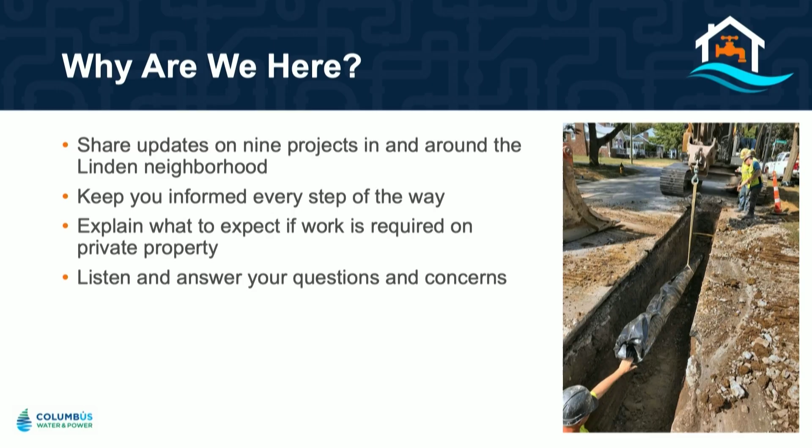Okay. So again, we're here tonight because there are 9 construction projects happening in and around Linden. I know not all of you are from Linden. Some of these construction projects will be happening outside of the Linden community. And again, we'll have a brief Q&A after this presentation and then release to an open house. I'm here with Emily Eskridge from Columbus Water and Power, and she's going to give you some information on our water quality.

Can you hear me? We got to turn down. That's all right. All right, can you hear me now? Perfect. Sorry, I'm trying not to have the mic interfere with Hannah's mic. They mic'd her up, but I get to hold one, so, it's exciting.

My name's Emily Eskridge. I am the Regulatory Compliance Manager for the Division of Water for Columbus Water and Power. I oversee all of our compliance requirements with the federal government, Ohio EPA, and under that is our lead and copper program, which is one of the programs that I manage. I'm here to talk a little bit about why we're doing this project and a little bit about things you should know about lead and lead service lines.

The first thing that we always like to lead with, though, is there lead in your water? We start talking about lead, and I know people see images of Flint in their mind. They worry about having a lead service line. Obviously, none of us want to drink lead. The good news is that we don't have detectable lead in our water. The City of Columbus samples on a regular basis.

We have a very effective corrosion control program, and we actually partner with the Columbus Public Health Department, and anytime we have a household with elevated blood lead levels, we take a water sample as well as any other public health investigation samples. The vast majority of those are non-detect. It's very rare that we see even the lowest level of detection because of our effective corrosion control.

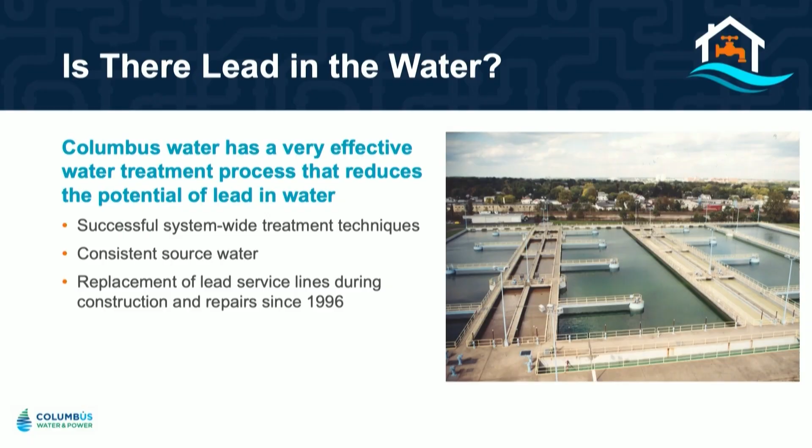I think the timeline has definitely advanced us to do this faster, but we were already doing it. We've been doing it since 1996. Now we've hastened the timeline. So that's why there's so many projects that you'll see in your area. There's a lot more work happening all at once. And ultimately, like I've said here, we have really effective corrosion control, and we've been actively removing since 1996. There's still some lead left. I know people are surprised by that, but it's time to take it out.

Ultimately, Lead Safe Columbus is a program that we've put in place in order to replace all lead and galvanized service lines. Galvanized service lines are galvanized steel lines. Most of them are downstream of lead, and they can collect lead particles. That's why the galvanized lines need to come out as well. These lines are well beyond their useful life, and I want to drive that home.

If you have a galvanized service line, it is at least 60 years old because we have not allowed that for 60 years in our system. A lot of them are being held together by the ground. So I really, really recommend that you sign a work agreement. Let us take it out for you for free.

It's going to save you money for us to do this, and then you're going to have a brand new shiny line that will really invest in the structure of your home and make sure that you have a good working service line for the next 20 to 40 years. We're doing copper, so probably 40 to 50 years. It'll last a long time.

As part of this program, we are prioritizing historically underserved communities. We're partnering with other city projects, and we're trying to collaborate as best as we can with other city departments. We want to be efficient. We want to get it done with one hole in the ground, not 3 holes in the ground. And we want to try to get in and out of your neighborhoods without disrupting your lives as much as possible.

So you might be thinking, what is a water service line? If you're here, you probably know. It's the line that delivers water to your home. It starts at the main. Most mains are under the street. It'll go to a curb stop. If you look near your sidewalk or in the tree lawn between the sidewalk and the street, you might see a little circle. That is the curb stop. That's the valve where we can turn water on and off. The city side is between that curb stop and the main. The customer side, your side, is between the curb stop and the home.

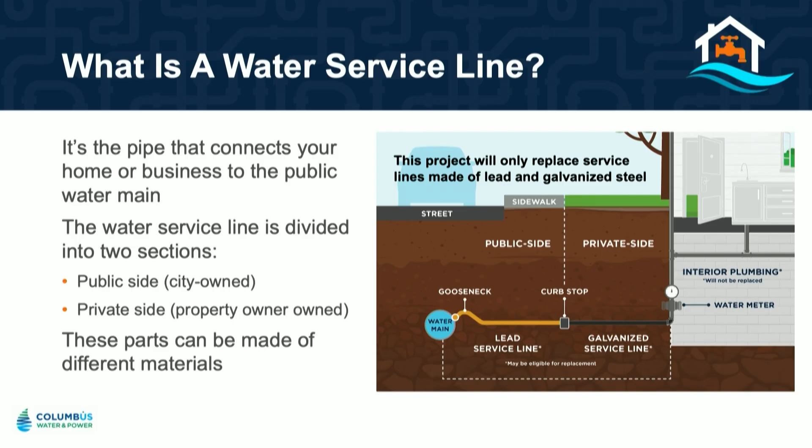I guess one thing, the slide changed. Those pieces can be made from different materials. So I know I talked about lead and galvanized. We're kind of unique in the city of Columbus. For the most part, and I would say we've never found lead on the customer side. The lead has always been on the city side. The customer side is galvanized steel. So when you're looking at your material, more than likely it's going to be galvanized if it's going to fall within our program.

If it is lead, definitely let us know because we want to know. But we have never found it. I think we have 200,000 lines identified. We've never seen it. So we're not really sure why that is, but it's kind of a unique thing to Columbus.

Ultimately, like I said, we're replacing lines for a few reasons. We started this program actually before the government passed their new regulations. The new federal regulations do require us to do this by 2037. But once again, it's the right thing to do. It's time to remove lead from the system. Galvanized steel can collect particles, like I said. That's why it's got to come out with the lead. For all intents and purposes, we're treating galvanized like lead. It can carry a similar risk. Our corrosion control works well with it too, so it doesn't mean that it is releasing lead. It just carries similar risk.

We are trying to incorporate this into other city work. We want to be efficient, and we're being proactive. Pipes break. Any sort of pipe breaks over time. It's part of good asset management. It helps reduce water loss. It helps our system function well overall.

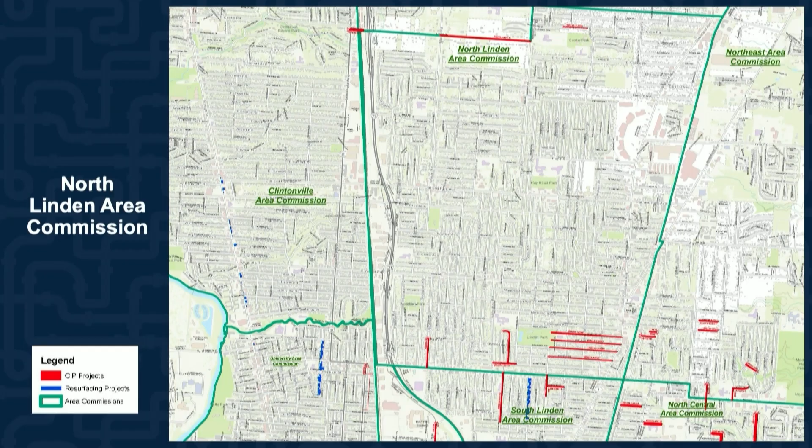So this could be hard to see in the back. We do have some maps up front. The majority of this work, not all of it, but the majority of this work is happening in Linden. So these red and blue lines will show where our construction projects are. This is a distribution-wide program at the end of the day, so eventually the entire distribution system will replace all of this material. We do have projects that we're talking about tonight that affect Ontario, Hunter Avenues, Italian Village, St. Mary's, Bexley.

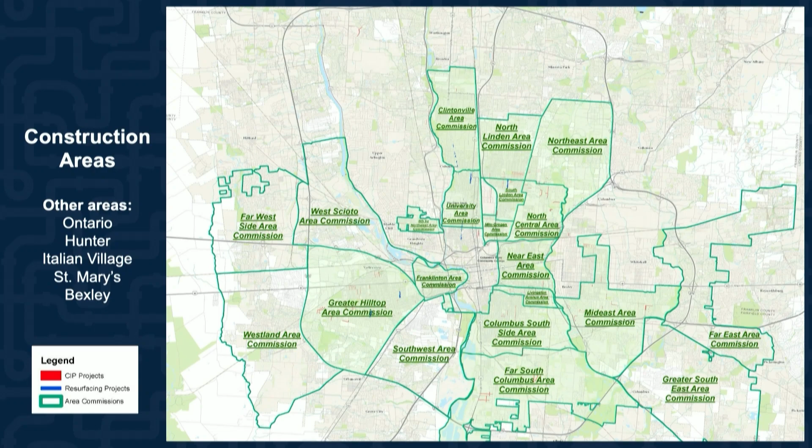What I really want to stress to everyone tonight is even if you have a copper or a plastic water service line, you could still be impacted by this work. Like Emily said, there are two sides of the water service line, right? The city side and then the privately owned side. Even if you have a copper or a plastic line, we could be working on that city side of the line, which will require your water be shut off for about 6 to 8 hours.

If there is galvanized on your side of the line, again, water will be shut off for about 6 to 8 hours. Landscaping is going to be impacted here, and we will need access to inside the home where your water meter is, usually in the basement. Like I mentioned, there's 9 projects. The majority of them are water main replacements, but there is some street resurfacing happening, so we may need to move our cars for a day or so. And again, there will be impact to landscaping.

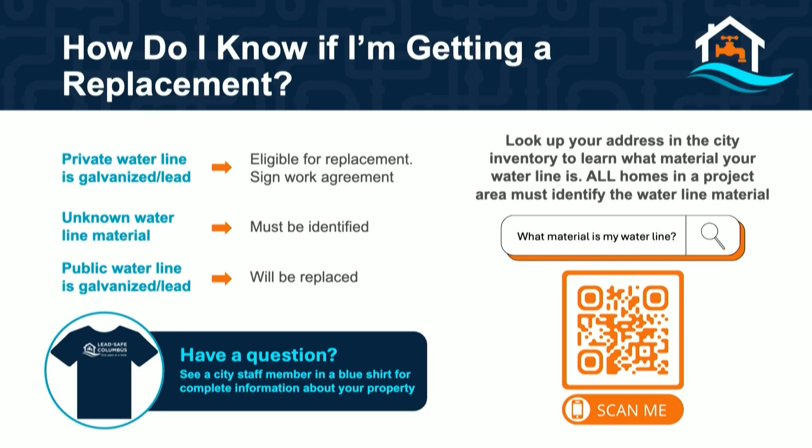So what can you expect from this construction? Now we know that everyone is going to be impacted by this construction. You can expect to continue to hear from us. Many of you may have already talked to some of our team members. We're knocking on doors. We're sending texts and emails. And everyone hopefully got a postcard in the mail that told you if your water is going to be shut off, if you're getting a private side replacement. Again, we'll have this information for you here tonight and can send this home with you. So if you didn't see that information, don't worry about it.

Important to know that when it is time to schedule construction, our certified contractors will call or email you. And that's the property owner. If you're a landlord and you would prefer us to coordinate with your tenant, let us know. Also, everyone will be receiving a letter in the mail at your address. That letter is going to give you 30 days to take action. So that could be, if you do have a galvanized line, sign a work agreement. The work agreement just authorizes the city to do the work.

Okay, basic expectations. What material is going in? We are going to be using copper. Copper is going to replace everything, and again, we're going from the water main in the street to your home if there's galvanized on that line. So again, the water meter is usually in your basement. And our certified contractors will need to enter your home.

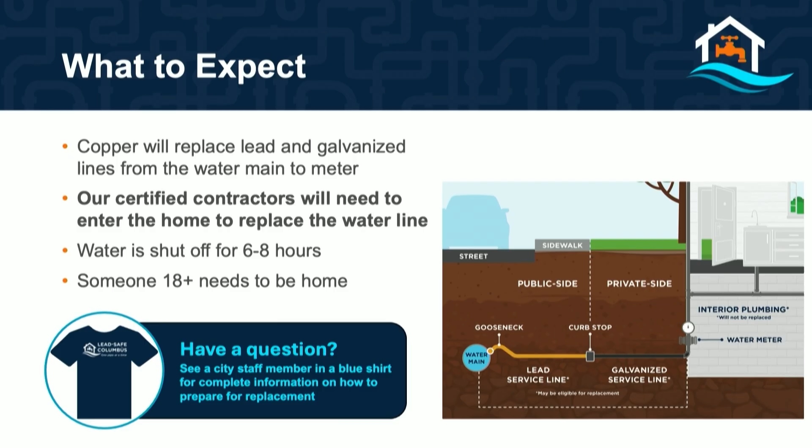So let's talk about coming into the home. We understand that this can be uncomfortable. No one likes to hear that the city has to come inside their home, right? Our certified contractors will primarily be the ones coming inside your home, and this is the only thing that we're looking for, the water meter. Our contractors need a clear and safe path to the water meter. That's the only reason we're entering the home. We are not looking at anything else in the home.

I understand that us entering the home, whether it's us or our contractors, can be uncomfortable. It can be uncomfortable for our contractors too, but we're going to be respectful of your space and try and get in and out as fast as possible. It's really important to note that whether you are an owner or a tenant, you have the right to ask to see one of these, a city badge. Our contractors, our contractor inspectors, any city employee will have a badge, and it is entirely within your right to ask to see a badge, proof of employment, before we enter your home.

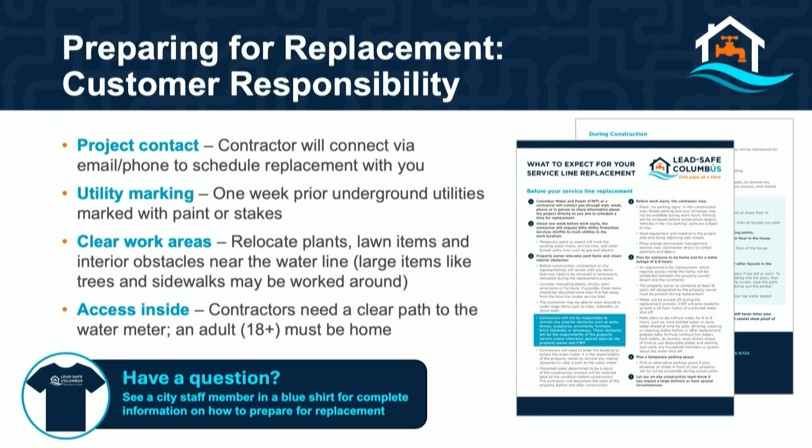Okay, so what can you do to prepare for a replacement? We have a full list of information for you on what you can expect from construction, how you can prepare for construction at any one of these tables. Again, our team needs a safe, clear path to the water meter in the basement, and they need about 3 feet by 3 feet of space around that water meter. So if you're like my mom, you're gonna need to move your Christmas decorations and your kids' memorabilia for a day or two. All right, so one of our master engineers is going to share some information on what construction is going to look like.

Thank you, Hannah. My name's Tim Huffman. I'm the chief engineer for the Division of Water on the distribution side. One thing I wanted to point out, we have some postcards up here. That QR code that got you to the survey is on this card. It's got a little photo of the different materials that you might have coming into your home. It's kind of helpful. Kind of gives you a little guidance on how to identify what that material is. If you don't have it in your packet, there's plenty up here for everybody to grab one.

As Hannah said, we've got a lot of projects. 9 projects is quite a bit in this area. Just to give you an idea, between the construction and the construction management of those projects, we're spending about $50 million on those 9 projects. We are working on not only our capital projects for water, but we're on sewer projects, city street projects, repaving projects, everything. Anything we can do to get out there and replace these services. We have quite a few to do. We've got about 60,000 to do right now, is what we're predicting. So we've got to do about 5,000 a year, quite a bit. So far we've done maybe 250, but we're learning.

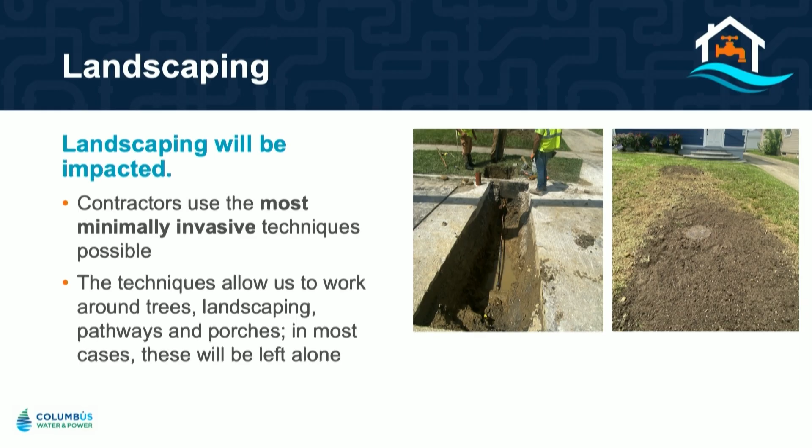What we will do, let's see, I think we got a picture here. Okay, yeah. So the construction process is we're going to dig a hole in the street by the curb stop and by the main, and then we'll come in your home, as you can see right here, and the contractor will pull the new line through the old line, and it will break the old line and pull through. Sometimes we can't get that to work.

Sometimes the old galvanized lines are so corroded, so built up with stuff, that we can't get a line through it and we can't pull it. So then that makes us dig. But if we can do this process, you'll have a hole out front and there won't be anything in your yard. Your landscaping will be okay. That is our preferred method, but we're not 100% successful with that.

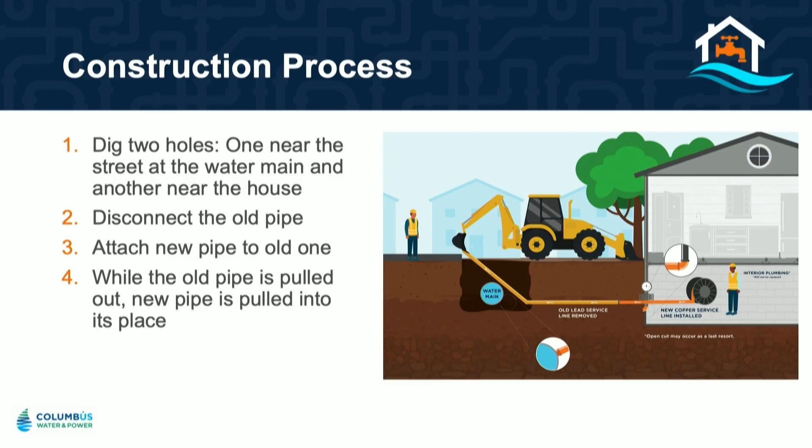So once they pull that through, they'll connect it back up to the street and they'll flush your line for a few minutes and you'll be back in service. So you may need to collect water beforehand so you can flush your toilets and things of that nature. And here's an example of that pull-through technique. They use the bucket of a backhoe, and they just pull that through with a steel cable, and it pulls the copper service right through.

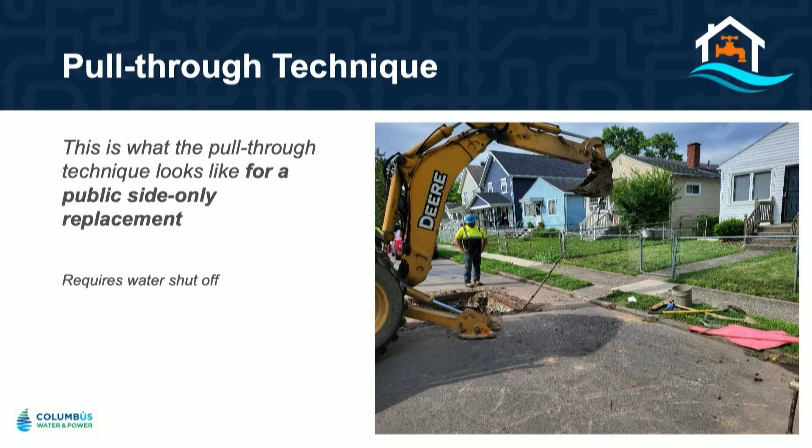It does require your water to be shut off. Hopefully it won't be 8 hours, but we kind of tell you that, so the expectation is you're going to be out of water for 8 hours, but we try to get the contractors to work as quickly as possible. So these holes, they'll have plates on top of them. So if you don't see plates, please call us. Our inspectors and contractors are not perfect. We try to make them perfect, but this is something for your safety. We want nobody to get hurt or injured while these contractors are out here working.

So on the water line replacement projects, we will typically be building a water main in the street. So one side of the street is going to be closed for construction. Through traffic is going to be coming through, so please drive safely through the construction zones. Please be mindful of the contractors. Their safety is important as well. But we'll install the water main, and then we test it, and then we have to chlorinate it to make it safe for you all to drink. That process takes about a month to do, the chlorination part, the street part. So your street will be impacted for a couple months, and then they'll start transferring services. So total, it can be a little over 2 months once we get everybody hooked up.

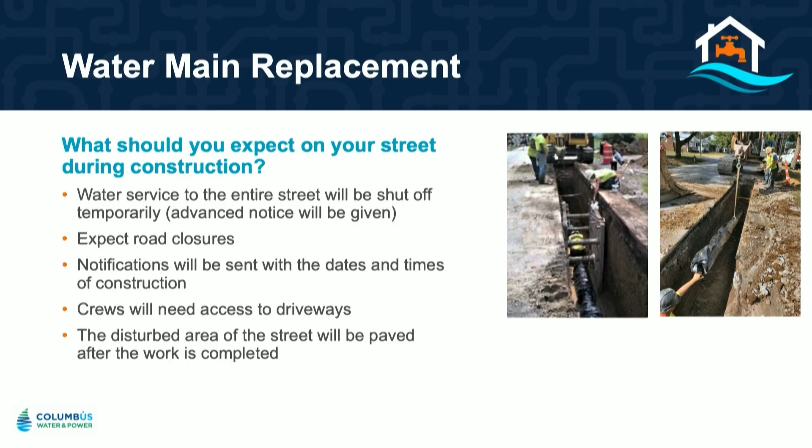But they will cross your driveways. They'll put steel plates so you can get in and out. You're always going to be able to get into your home. Emergency services will always be able to get to your home as well. Safety is our biggest concern for you all and the contractor. And then once we're done, we pave the side that we disturb. We're not paving the entire street. When we do the water line replacement, we just pave the side that our water main is on. I know a lot of times folks don't like that. But we're the Division of Water. We're not public service. They do all the resurfacing in the city.

On the projects where we're just doing the lead service replacement, we will restore the pavement back, but we're trying to do that ahead of the resurfacing projects. So it may not look pretty until public service comes through and paves that street after construction.

Well, that's you. All right. I'm going to take it back over. Thanks, Tim. No problem.

So after construction, you're going to see a couple things that happen at your house. Probably before construction starts, you're going to receive a kit. That kit's going to have a folder in it that kind of looks like the folder you may have tonight. That folder's got a lot of information about what to expect, what you need to do, what you can do on the back side, any sort of health-related information, and things that you can use. Also in that kit will be a pitcher filter.

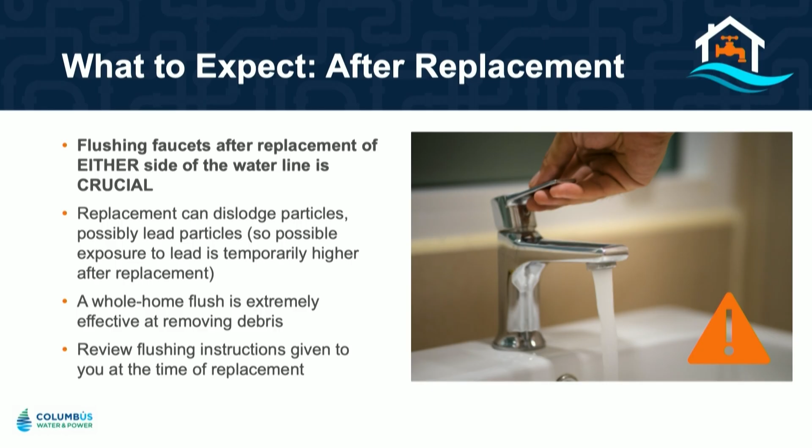And so we'll run the water. A whole home flush is extremely effective. We've done follow-up sampling before and after flushing. Flushing works very well, but the flushing is really critical after the line is replaced. As Tim said, safety really is our priority, both for our customers and for our contractors. This is a part of safety, in my opinion, the flushing afterwards.

If you ever come talk to me about lead, that's probably the number one thing I'm going to tell you. I know I've told at least 1 or 2 people tonight that they should always flush, but flushing is something that will happen after your line is replaced.

In addition to this, I just mentioned the filter kit. You're going to receive a kit. It's going to have a water pitcher filter in it, similar to what you would buy at Walmart. That pitcher is good for up to 6 months. We recommend that you use it for the next 3 to 6 months. However, the flushing should be effective.

It's just for your peace of mind if you would like to use it, just to make sure any sort of temporary lead or particulate that may have been left behind is captured by that filter and not drank by anyone in the home. The flushing really is the main thing, though.

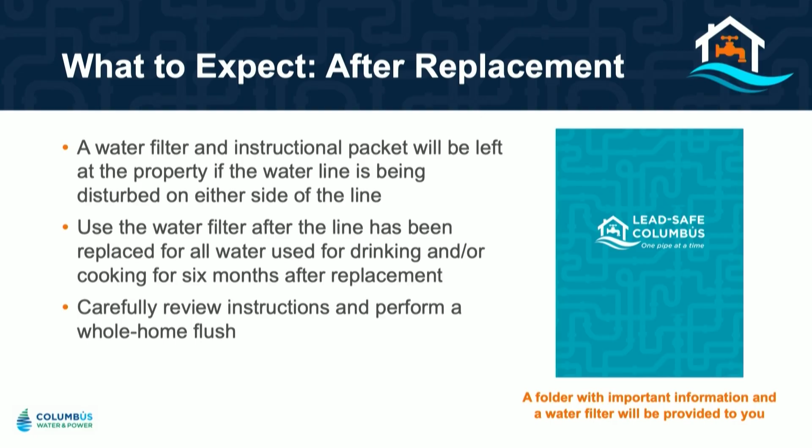We do recommend that you read the instructions in the kit, look at the filter instructions, look at any sort of post-replacement activities that need to be included, including like Hannah said, watering the lawn, taking care of anything that may be left behind. And then the other piece of that kit is if you have follow-up questions, if there's things in there that you're like, man, I really wonder about this, there's information to reach out to us in it as well.

And so we're here as a resource. We want to make sure that you have a good experience. We want to make sure that you understand the safety of your water, that we're doing everything we can to make sure that you're drinking safe water with your new copper service line.

In addition, we are going to do restoration. Something that's really important to remember, though, is restoration could be weather dependent. If your line gets replaced in January, grass doesn't grow very well in January. We will come and reseed when the weather is favorable for grass to grow. The same thing with concrete. Concrete really doesn't lay well below certain temperatures. We want to make sure that we're laying concrete that's going to last for you.

So your sidewalk may be impacted for a little bit if we have to remove any concrete. We'll make sure that there's at least a temporary patch or some gravel fill-in. It's going to be navigable in that time period, but we may have to wait for warmer or better weather if we're in a cold weather month. In general, though, we don't always restore right away. There may be a 1 to 3 week wait as we go down the street, and then we have other contractors come behind and do the concrete and restoration work.

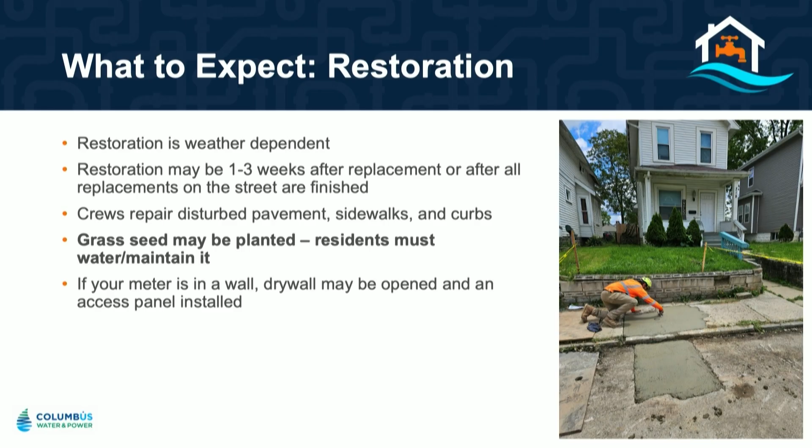One last thing I think I didn't catch on here. Hannah talked about access to the meters. We do need to access your meter. Sometimes people wall them in. If your meter has been walled in, we will need an access panel to that meter. It's a 3 by 3 foot space. We will do our best to leave a very nice access panel when we leave as well, but we will have to access it as part of this work.

All right. Hannah, is that you? Done. We're almost done. We're almost there.

What's next? So like I said, anyone with a blue shirt can give you more information about the work that is going to impact you directly. So come up to some of our tables, come up to some of us floating around the room after this. We need every single one of you to tell us what the material of your water service line is. Some of you have already done that, so thank you. If you have not done that, then you may receive some more door hangers, some texts or emails from us. Everyone needs to do that.

Maybe you've already told us what the material of your line is. If you do have a galvanized line, then you can sign a work agreement here tonight. We do have paper copies for you to take home or for you to review. The work agreements are just authorizing the city to do that work.

So everything I just said, again, we need everyone to identify the material of their water service line. Okay, we are about to open it up for a quick Q&A. I want to emphasize that we are not answering questions specifically about your property. If you come up to one of us in a blue shirt, we can tell you what our records show your water service line material is. If you need to sign a work agreement, come up and ask us those specific questions. We want to answer some general questions and concerns here and now.